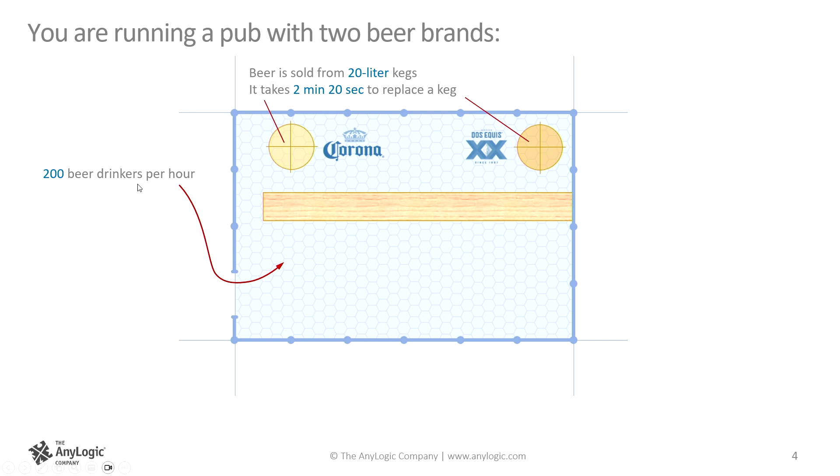Now, beer drinkers come in at a rate of 200 beer drinkers per hour. They can only buy beer at the counter, and they only buy beer in pints. And just for your information, 1 pint is 0.473 liters.

After drinking a pint, there is a choice, as in the real pub. With a 40% probability you leave, with a 60% probability you stay for another pint. Okay, and we will have some unhappy customers. So if within 5 minutes I cannot attract the attention of a bartender, I leave angry.

Okay? Now, from the very beginning, I will tell you that you will not be able to do both beer brands within this 1 hour. Therefore, please, for now, disregard this part of the problem definition, which is below the floor plan, about when you drink Corona and when you switch to Dos Equis, etc. We will only be able to do Corona, because it starts with a lighter beer.

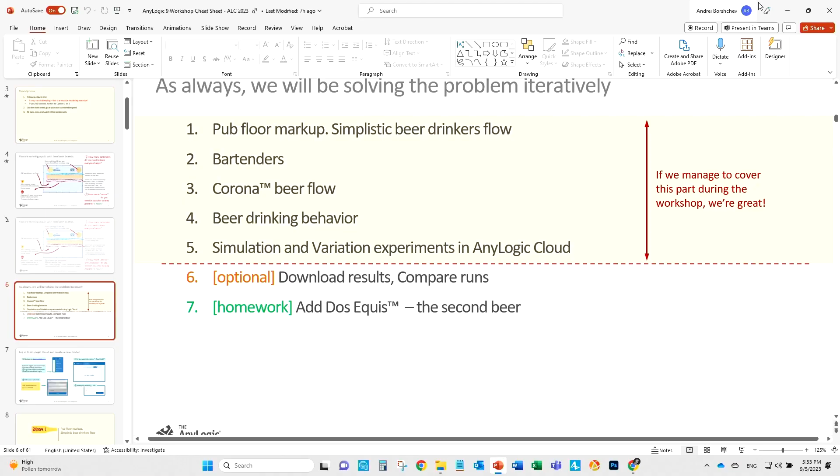Okay, so I'll close my presentation and switch to the browser. This is obviously Chrome browser. I am already logged in as a subscriber. You see the star over here? That means that I'm a subscriber.

AnyLogic 9, the model development environment, the model editor, is only available to subscribers. Now, at this time, I would ask everybody to log in using your credentials, which are on the back of your handout, like this. So go to cloud.anylogic.com and log in.

So I'm already logged in, so I won't be doing that. Now I assume that those who want to work with us now are already logged in.

So the first thing that I'll do, I'll switch from the public models to my models. And there, in my models, you probably have the empty workspace. I have a lot of them, but nevertheless, everybody should have this new model tile.

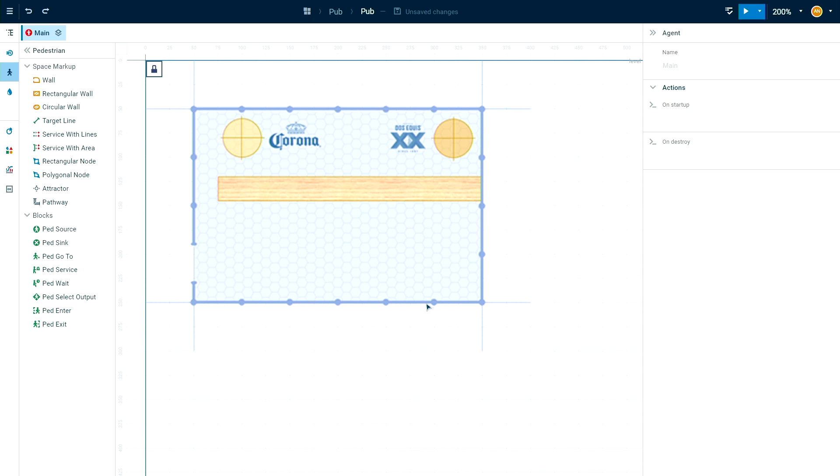Click, next click, another one, and double click to finish. Did it create? Okay, yeah, it did.

I'll make the wall thicker, like this. Now, this is obviously a polyline. If our pub had some curved segments, we would be using the guidelines like this, but we don't need that at the moment. It's a very square pub.

Okay, now next thing is this counter. So for that, I will use a rectangular wall, this one, and create a rectangle here. It can touch the outside wall, or you can leave the space, doesn't matter.

This counter will have a name, and the name is specified here in the properties: Counter. And one more thing I want to change here is the Z height. So the Z height here should be 10 to make the counter lower than the walls.

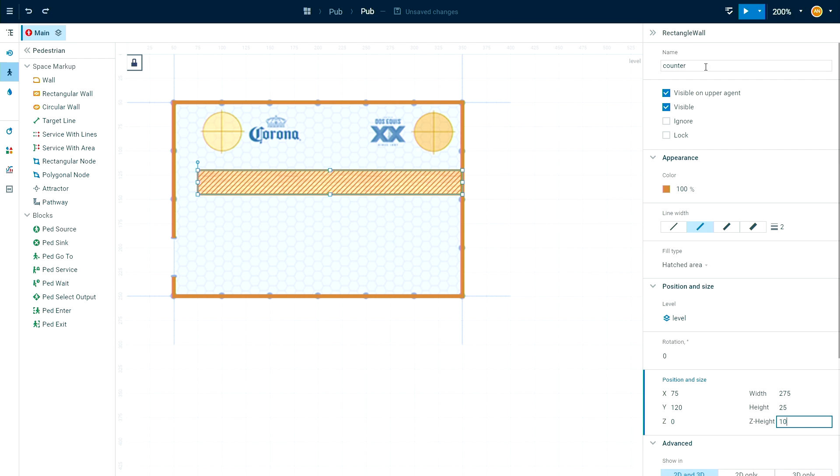The reason I need the name is because I will be referring to this markup from my flowchart. Okay, and two other items, two target lines: one here at the entrance, and I'll just call it entrance, and another one near the bar. This is where the beer drinkers will be calling bartenders and drinking beer, paying for the beer. So this line also needs a name, so I'll call it line counter.

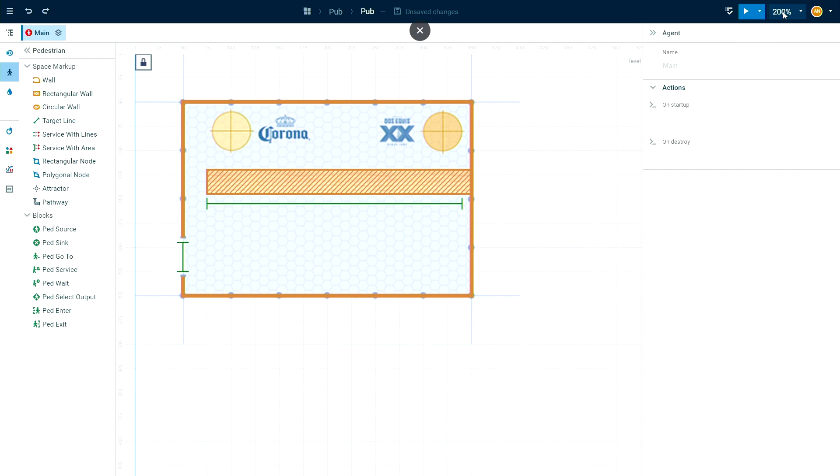That is it with our simplistic markup, and I'll go back to 100% zoom. For that, we have a shortcut. So if you click here at the scale, one click goes to 100% scale, double click also brings you to the coordinate origin. So if you are lost somewhere and don't know where you are, you can always double click here, and that brings you back to the coordinate origin.

Next step is the simplistic flow chart. So I'll stay within the same pedestrian library palette, and of course start with the pedestrian source. Our beer drinkers will be coming in, then they will be going to the counter. So I'm dragging the next block. If we drag it aligned to the previous block, and if the port aligns, then the connector is automatically created.

Now, after going to the counter, let's say in the simplistic version our guests will just drink, and that will be modeled by a delay block, which can be found in the process modeling library. So I go here and drag the delay block. For example, the block did not connect, and if it did not connect, I can connect it by clicking here and clicking at the other port. There's automatic alignment of connectors.

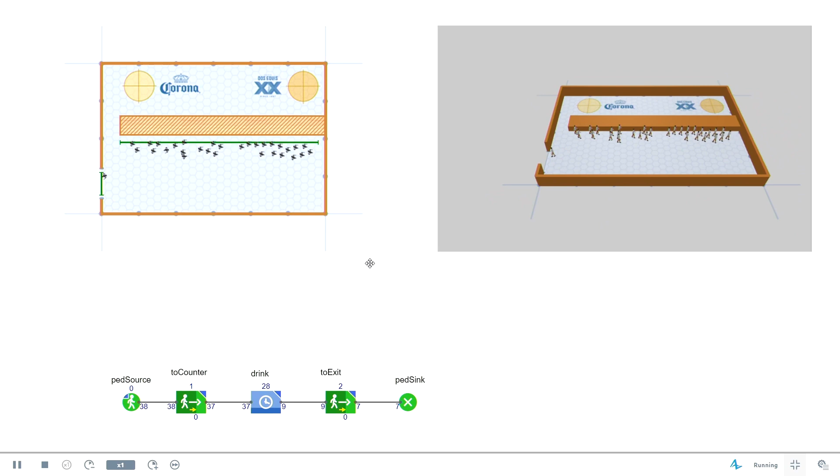I can do a full screen. So, well, looks like everything is as expected. People come in, drink, and go away. What else?

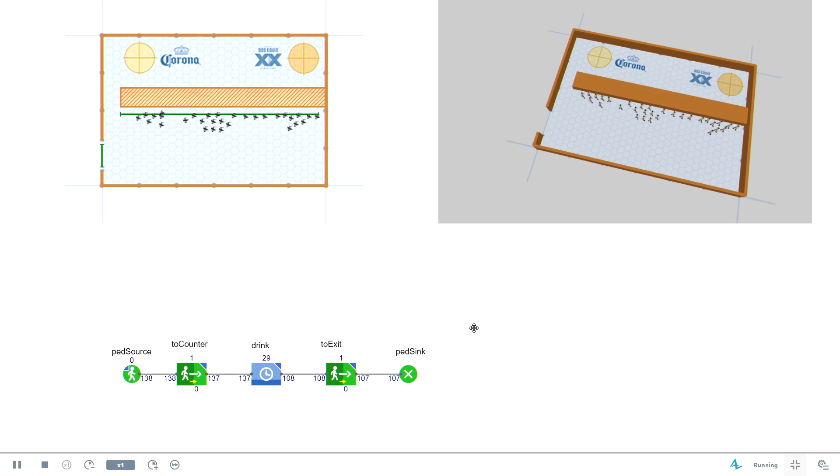Yeah, you can navigate the 3D window just using the same keys as in AnyLogic 8. Here, panning is left drag, left button down, and then drag, if you don't remember that.

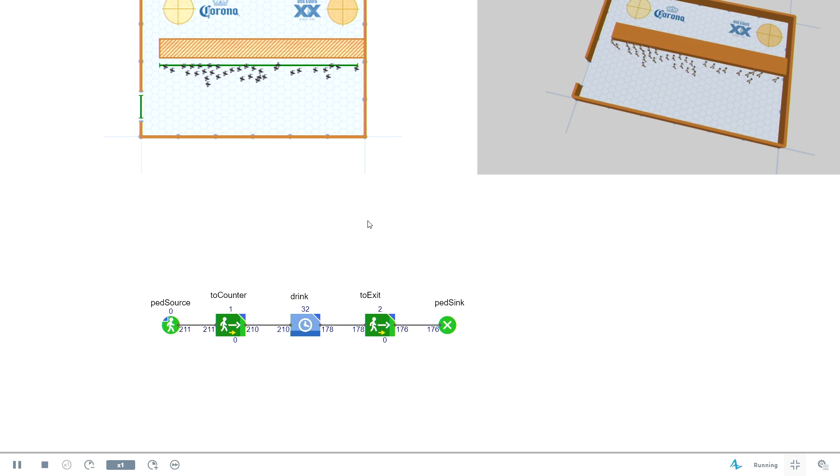Now, one of the frequent mistakes is if somebody forgets to specify the maximum capacity at this delay block, then you will only see one customer here drinking. And if you see that, then go back to your editor and fix the maximum capacity. Okay, so that was the first successful run.

Hope you're getting similar behavior on your computers.

Phase 2, adding bartenders. Okay, I will zoom out a little bit and I will select this whole flow chart and move it down just to have more space. Okay, and again, clicking here brings you back to 100% zoom.

Next, I will create the home location for my bartenders. It will be in between the logos of Corona and Dos Equis.

Here, I go to, I can go to either one. I can go to the process modeling palette and choose rectangular node, this one, and draw just a simple node here and rename it to node Bartenders.

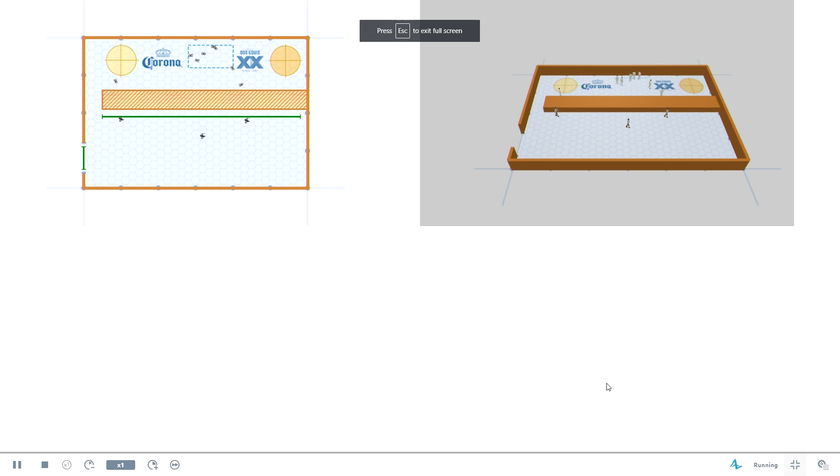Okay, so let's run the model. All right, what do we have here? So let's look at 3D. More or less expected behavior. So we have guests coming in, walking away, and some bartenders moving behind the bar counter. Okay, this, only 8 bartenders, constantly busy. Yeah.

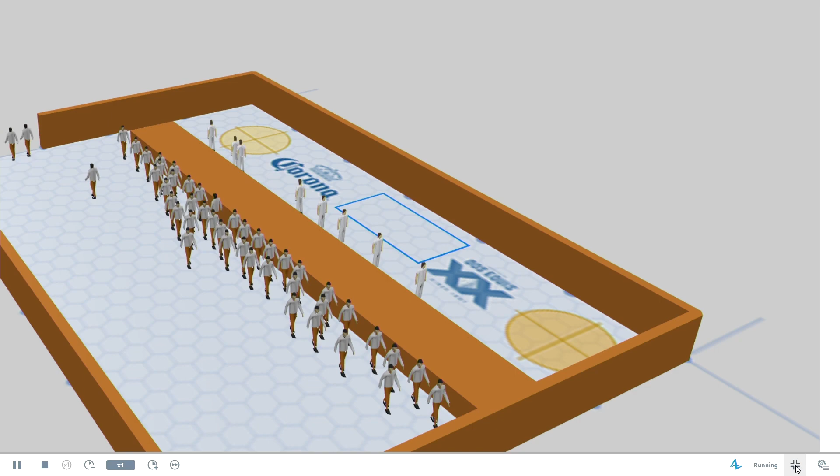Very good, very good. And then the next phase is we will introduce the actual beer in our model, and for that I'll ask Nikolay to continue. Thank you, Andrei.

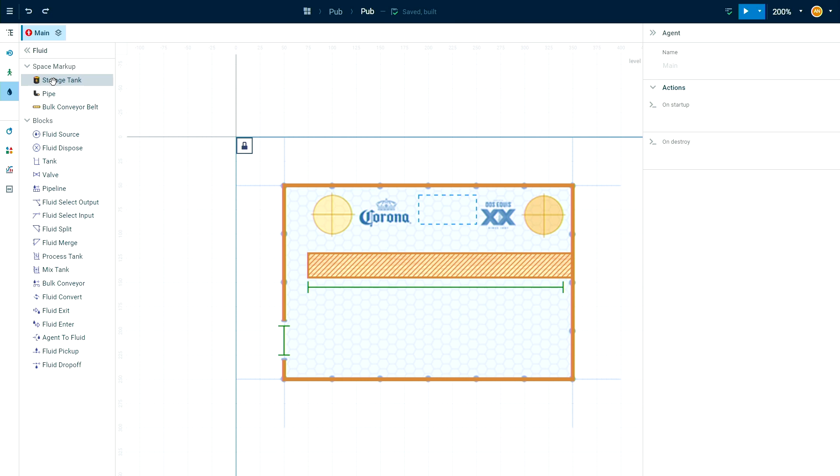Currently our model operates with almost an infinite amount of beer, and to model the beer flow, we will use the fluid library. So here, switch to 200% zoom and add the storage tank markup here in the place where the Corona keg should be located, and name it storage keg Corona.

So there will be the animation of our keg with Corona beer, and it will have a height of 20.

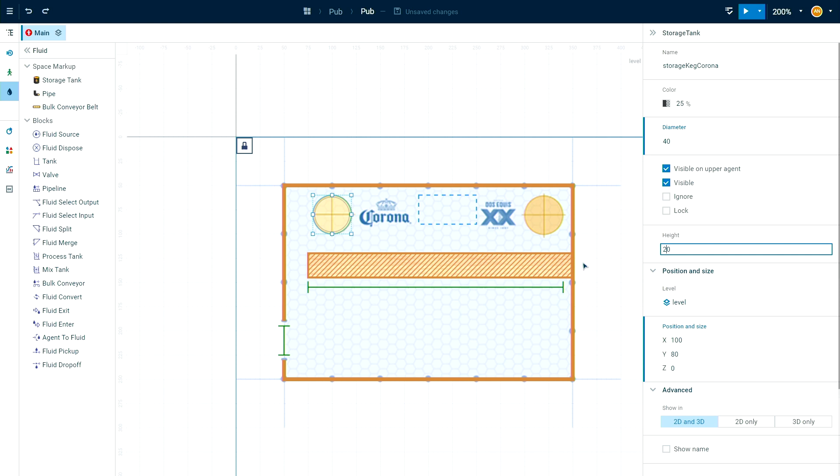Now let's add some logic. We go to the flowchart and add a variable from the basic elements palette. Name it pint. It will have a value of that magic number, and we can check this variable as constant, just so we don't accidentally change the value at runtime.

Let's model the keg. We switch back to the fluid library palette and use this tank block. It will be named keg Corona, and it will have a capacity of 20 liters. Please notice units, so we change here to liters. The initial amount will be 20 liters as well, and it will have a limited output rate of 0.1 liters per second. This is to model the rate at which you fill the glass of beer, as you probably remember from the problem specification.

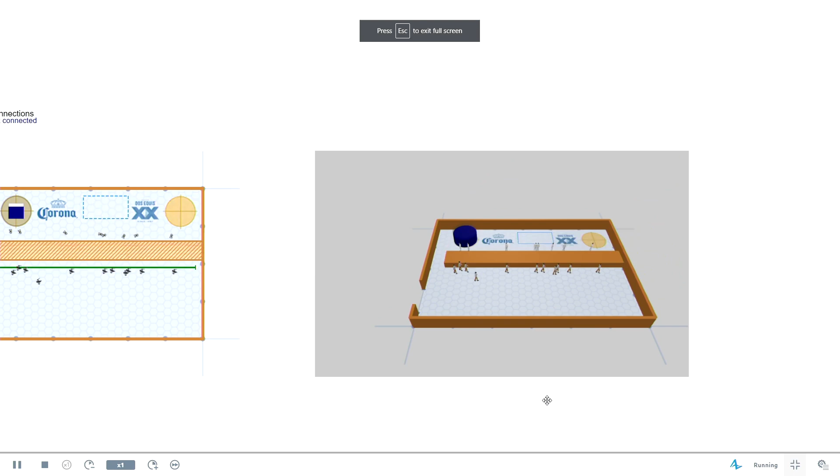Let's run the model and see what happens now. Our model utilizes 3 libraries: modeling, pedestrian, and fluid. Let's go full screen and see this is our keg, and it's getting empty now. You see all these new incoming visitors are getting angry, no beer, waiting.

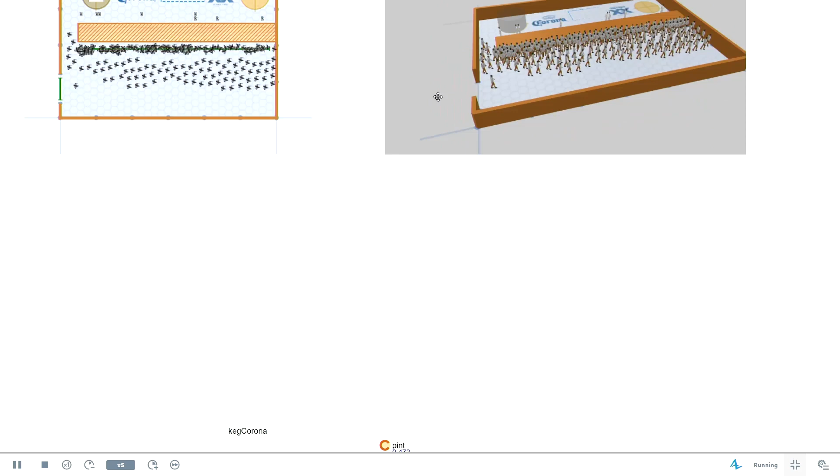So we need to somehow solve this situation. We'll return back and model keg replacement. The easy way to model the replacement of the keg is to create a fluid source which will emit the beer with some small output rate. We drag this fluid source block and name it replace Corona.

It will have a rate of 0.1 liters per second, just to model the time the keg takes to be replaced. The output will be controlled by us calling this special inject function, and it will have 0 liters initial amount. We also would like this beer to be colored in something, since the beer is light yellow.

So we switch here to custom batch. We can name the batch Corona. Check this custom batch color button, and this is the batch color property, and we choose something like light yellow. Everybody knows Corona colors, so.

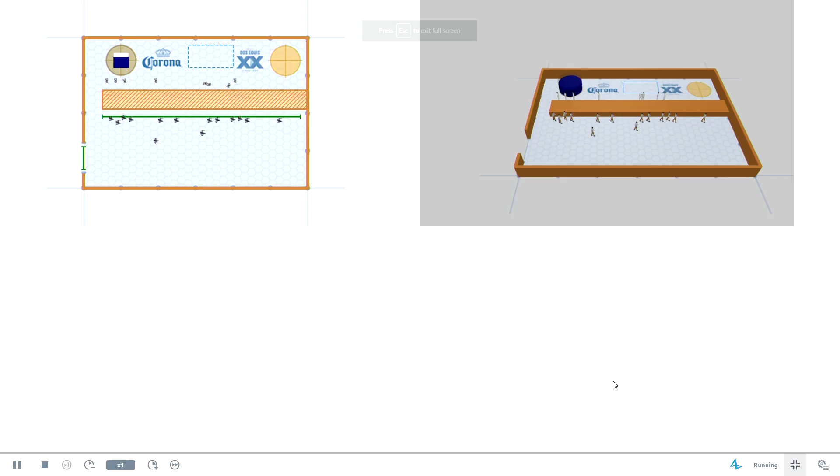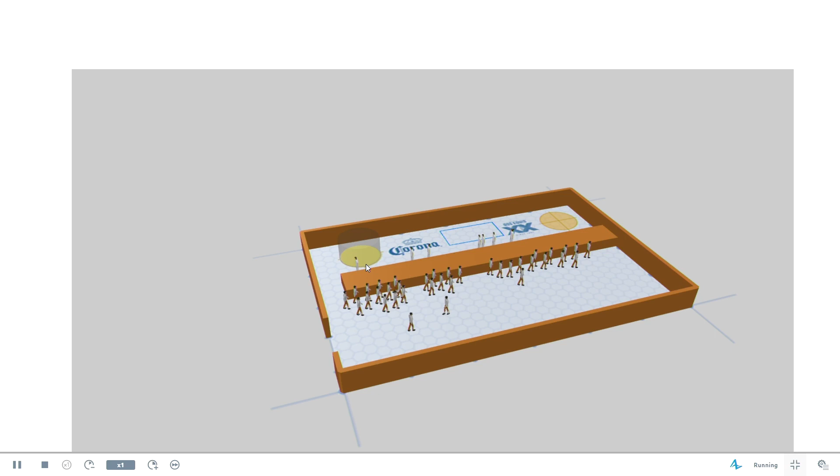So initially the beer is navy blue. You can also change the initial batch color, and now it's getting refilled. We receive an almost full keg of beer, while the incoming visitors keep draining it. And the atmosphere in the bar is getting better.

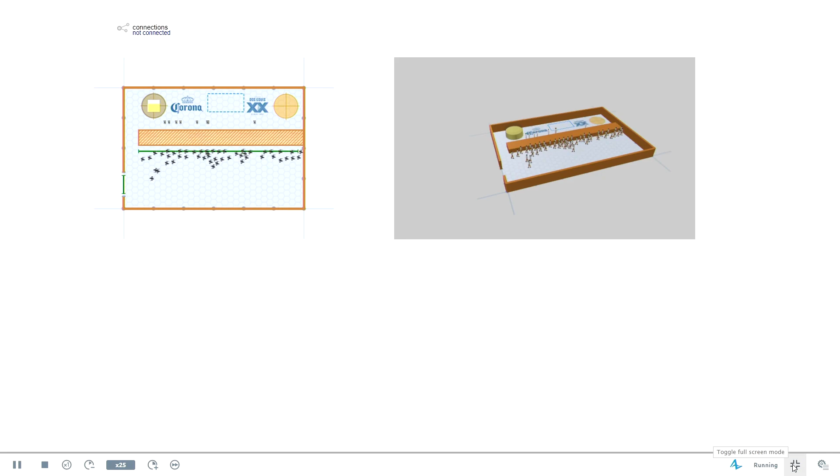Fewer angry. We don't know how many are angry. So let's count them and display some visible, observable data. By the way, I've accidentally clicked this button instead of the full screen mode button. This is a developer panel button, like in AnyLogic 8. You can observe some internal details of the model, time, etc.

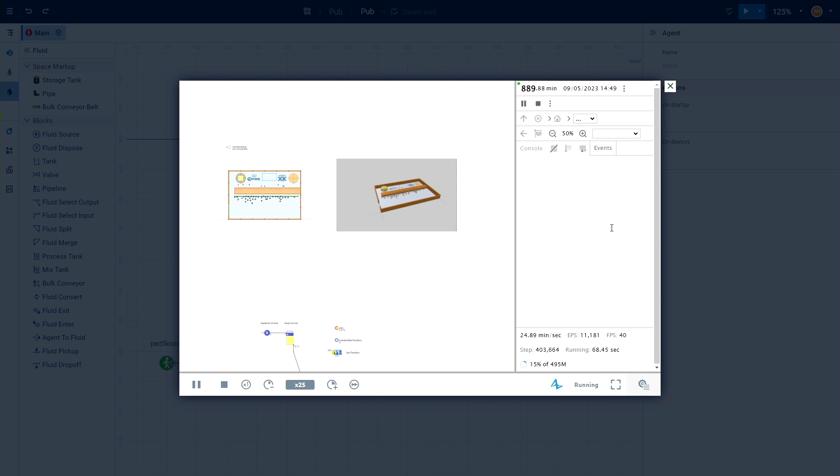So we currently stop the model, and we will model the beer drinking behavior. In a usual pub, the visitor often decides to have yet another pint of beer after drinking one. So we'll add a choice block here from the process modeling library. It's select output. We'll name it 'enough, enough'.

By our problem specification, we have a probability of 40% leaving, 60% staying. So we type here 0.4 and connect the port of this enough block to the incoming port of the seize bartenders.

This will be our returning and ordering one more pint logic. And to model those visitors who get angry, we will use the exit by timeout property of this seize bartenders block. So we check here enable exit on timeout, and we will have the timeout of 5 minutes.

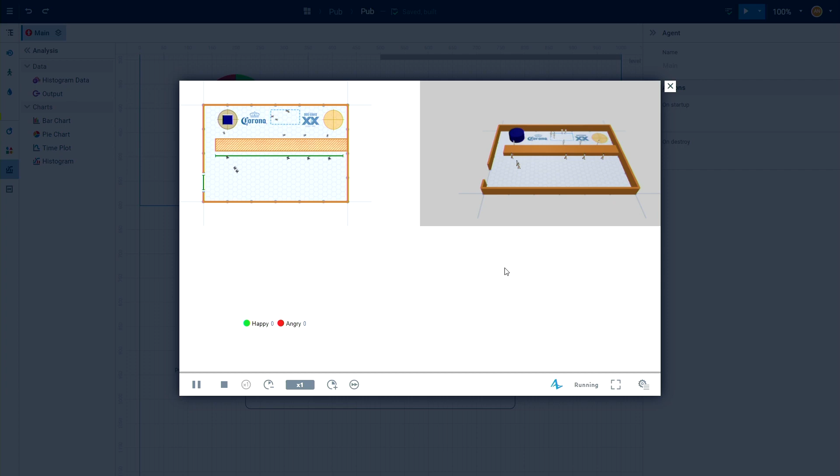By the way, the model is running. I'll switch to full screen and to the virtual time mode for the data to be ready faster. So we can see here that our model has about 20% angry visitors. This obviously happens because we don't have enough bartenders.

So let's continue with our experiment. Okay, so the last bit that we want to show you is how the AnyLogic development environment integrates with AnyLogic Cloud or AnyLogic Model Manager.

Just to remind you that we're doing all that in the browser, just press F11. So we're still in the browser, okay? And I want to perform some experiments with this model, which are more complicated than just simply the animation runs that we use to visually debug the model.

So I will add one more item here, which is the output. In the same analysis palette, we have this output item, and I'll drag it here. I'll name it consumed Corona. And the value, I will take from this Corona keg output outflow, let's say.